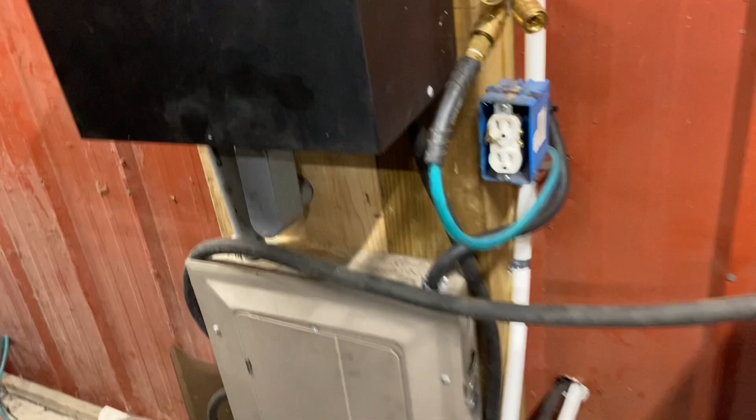I'm not an electrician by any stretch, but I did put this in. I have it mounted here with a 3-phase panel to break out all my power to different machines. Unfortunately, I only have 4 breakers, and I've got quite a few machines that run off of these, so I'm not able to run them all at the same time. I did pick this unit up used, but they're relatively affordable when you look at the cost of getting 3-phase into your shop. One thing specifically with this Haas VF1 that was an important note is this guy right here.

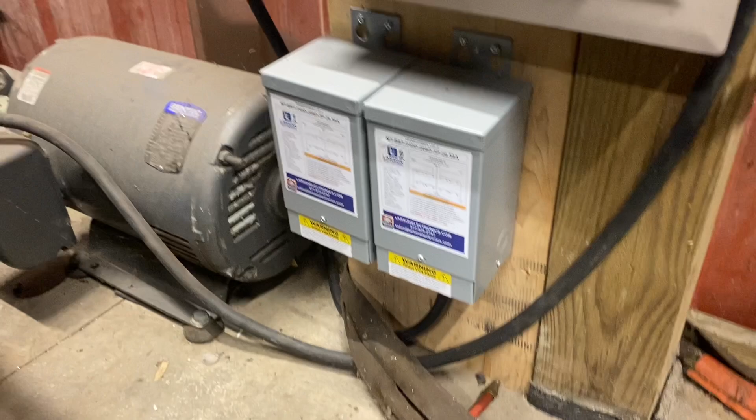I don't know if all the machines are like this, but this VF1 is rated for 230 volts, typically plus or minus 10%. The 3-phase power I bring into the shop combined with the phase converter's output actually ends up close to 250 volts, which is pretty awesome in terms of voltage supply, but it's too much for that machine.

When I first hooked it up, I had trouble with it overheating. If I wasn't running it consistently, it would sit and get an over voltage warning.

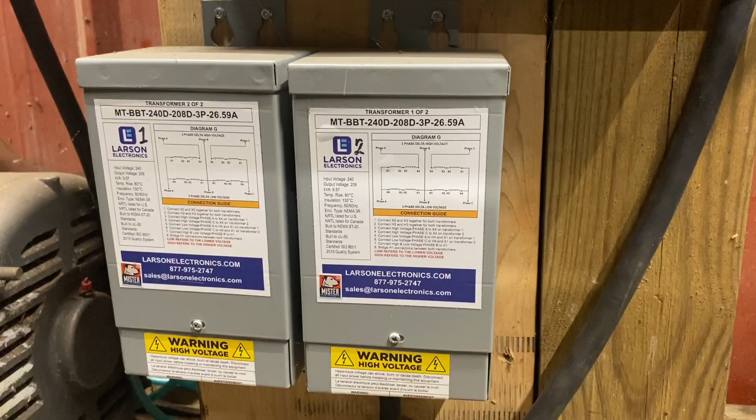It would shut off, and it was really frustrating. This took me a long time to figure out the right transformers to get. This is a buck boost transformer. If anybody has questions, I could probably find my original purchase order. I remember it was about 850 bucks, and that was kind of a bummer - money I really didn't want to spend, but it solved all of my problems.

It works great, and I haven't had that problem since. So I'll flip my phase converter on here, and I'll be able to power up the machine.

There's a breaker on the bottom of this phase converter that I often shut off. Occasionally I've had times, I don't know if it's supposed to do this, where power comes out here with it off on one of the legs. I like to be safe and not send power to my machines when I don't need it. I also sometimes come in to work on my machines and like to have the breaker off, so I always flip that off as a safety precaution. I don't know that you have to do that, but I like to.

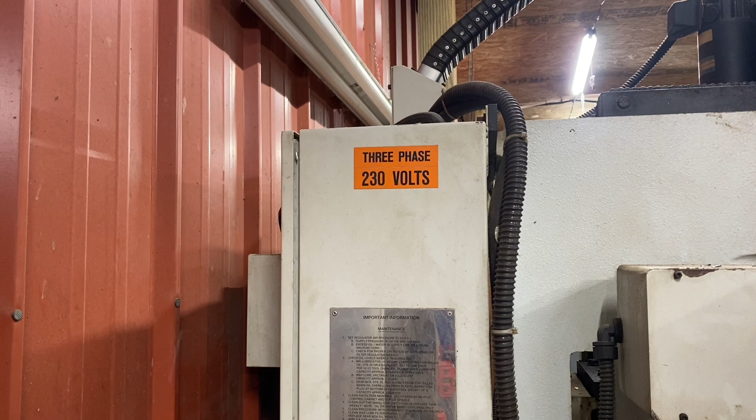Here's the label that says we're exactly at 230 volts. You can look at some of the maintenance stuff on here if you're able to read it. It's a pretty awesome machine, but you've got to send it the right power.

If I didn't mention it before, this is a Haas VF1. It's a 1996, almost as old as I am. In the world of CNC, that's a bit of an old machine.

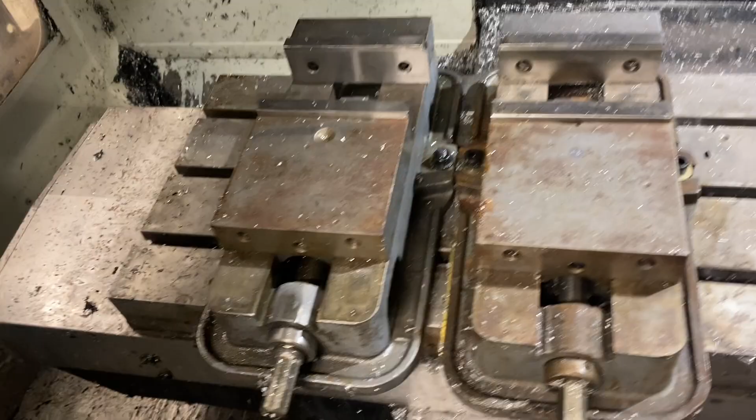I cleaned it up a little bit for this video, but I left some of the chips in there from this week because I'm being kind of lazy.

If there's one recommendation I could make, my only regret with this machine is the size. When you look at the size, this is a 16 by 20 table with 20 inches of Z-travel. When you think of a part that is 16 by 20 by 20, it's like, oh my God, that's huge, I can make some really big parts.

When you start to put in some longer tools, some drills, you lose a lot of clearance here. When you put a couple of standard vices on, you lose a lot of clearance. And if you have to bring a big tool around the outside of your part, that cuts into your work area quite a bit. But I am really happy with this machine.

I don't think I'll get rid of it. I'm happy with the price I paid for it, and I'm happy with the quality of it.

I am in the market for a larger machine just to make it a little bit easier to get at bigger parts and to have a little more high density work holding. There's a lot I could do, put a base on here, dual station vices, things like that. But ultimately having a bigger machine is a pretty awesome thing to have.

I do have this door very well engineered for a bypass. That's probably not a safe thing to do, and there is a reason they want you to have both doors closed to function this machine. But for video's sake, I'm going to leave it open for a little bit.

And I'm going to step you through the power up cycle. On these machines, it is really, really easy. I'll try to keep as much of the controller in frame as I can.

All right, power up is pretty easy. I hit my power on. Assuming I am sending the proper phases as well as the proper amount of power, this machine will power up. I apologize, everything is going to start getting a little bit loud.

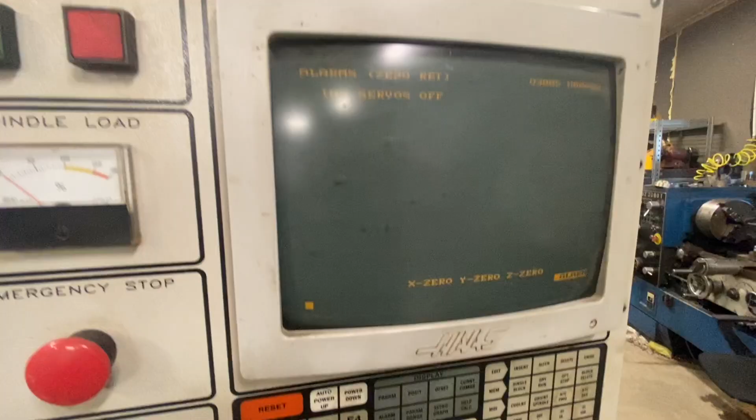Now when I start up, I am going to come up here with a servo off alarm. It's going to say XYZ0. It also has loaded up here the last program that I was running. When I hit auto power up, right down here next to my reset button, that's going to start homing all of the axes. I happen to have tool 1 already in the spindle. If I didn't, it would come and grab that tool as well.

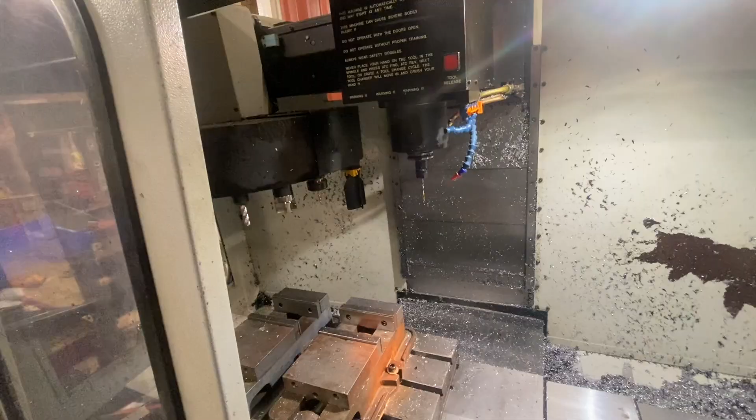The other important thing with this machine is having adequate air supply. You want to make sure that your air compressor is rated. I forget exactly what this takes, it's not a ton. I did have it on a pancake compressor for a little while just because it was convenient and I had one sitting here and didn't want to plumb air lines. That was really annoying because occasionally it would lose air pressure changing tools, and I didn't like that at all.

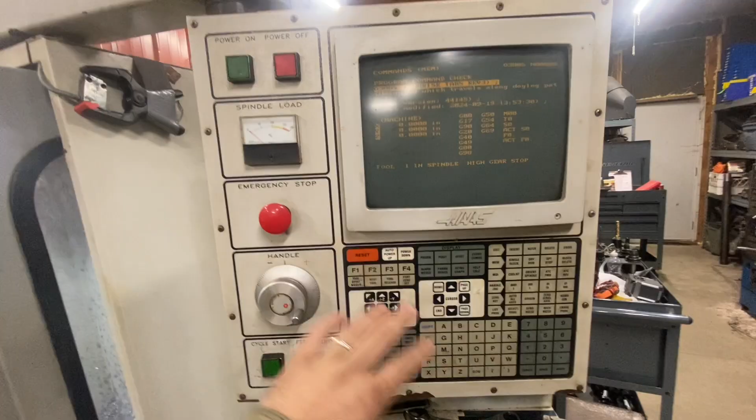It was very frustrating. This controller from 1996 has a bit of a different look obviously, but the buttons are in the same place. The functions are very similar to the brand new machines that I run at another facility that I work at. I'm going to show you some basic functions here. I'm not going to work through everything in this section because we're going to look at moving a program in here, but I will show you my program button will take me to the last program that I was running.

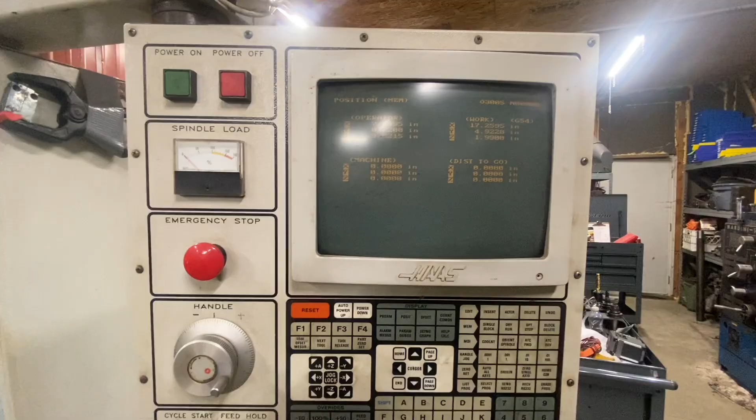My position button will take me to my position screen with my operator 0, in this case my G54, but whatever offset my program was last working in. My machine 0, which obviously everything is homed, as well as my distance to go if I'm in the midst of running a program. This is one of the things that I really wanted to get into the video.

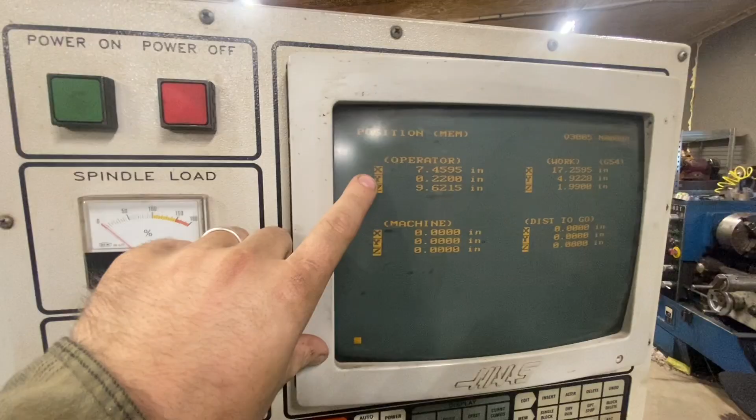This is something that I could not find up until about a month ago. I've had this machine for a little over a year and I was completely dropping the ball on this particular function, and that is my ability to zero my operator screen. This is really, really handy if you're using something like an edge finder, or perhaps your Haimer indicator to measure the height on a part and then on a feature or something like that. That operator screen is really, really handy.

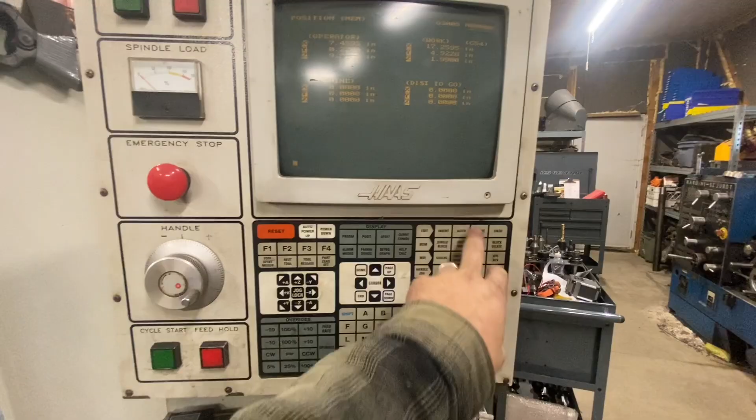I tried about everything, hitting X over here on my handle jog, origin, X alter origin, X alter origin here, and I was never able to get this screen to zero out and let me use an operator DRO. If this is something you've had problems with, I've read about it on forums and was never able to find this information. I accidentally bumped a button and realized what I was doing wrong, and I felt like a total idiot because it's incredibly simple.

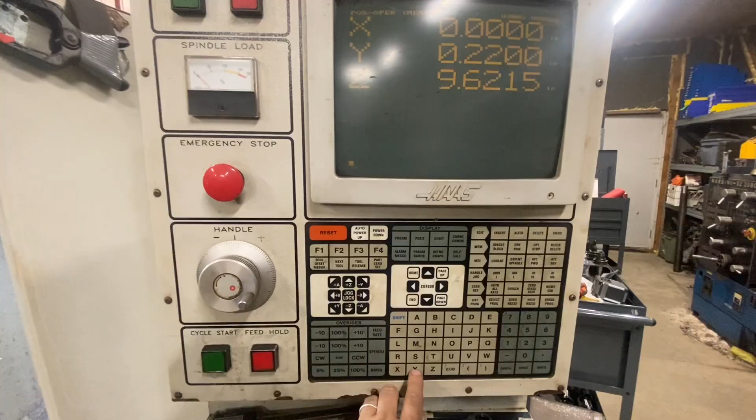All I have to do is hit my page down button. When I hit my page down button, I can move through these screens independently, and then ultimately get back to my home screen. If I hit it once, you can see here I am in my position operator, working from memory. In this screen, I am able to say X, 0 point, origin, and you can see that will zero my X axis. I could do the same for Y, 0 point, origin, and that zeros my Y axis as well.

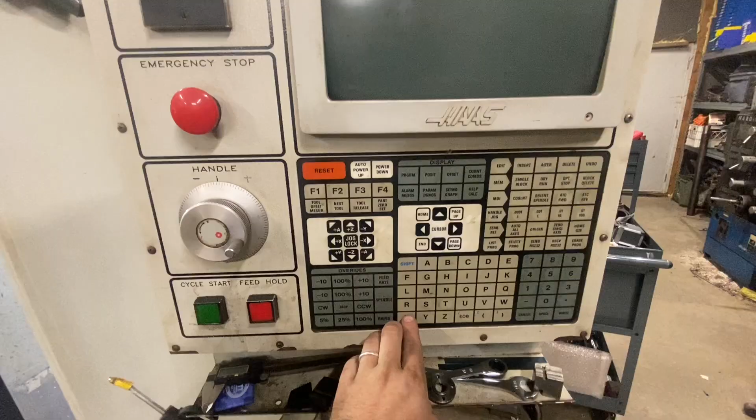I believe I can also punch in values, though I haven't actually tried this because I've only been using this feature for a couple days. I can say X 1.0, origin, and now I have 1 inch on my X. So if I wanted to move over exactly an inch, for instance, I'd be able to do that to find my zero. This is an awesome function that I wasn't able to use, and now I can. It's great, I can't believe I hadn't looked at that before.

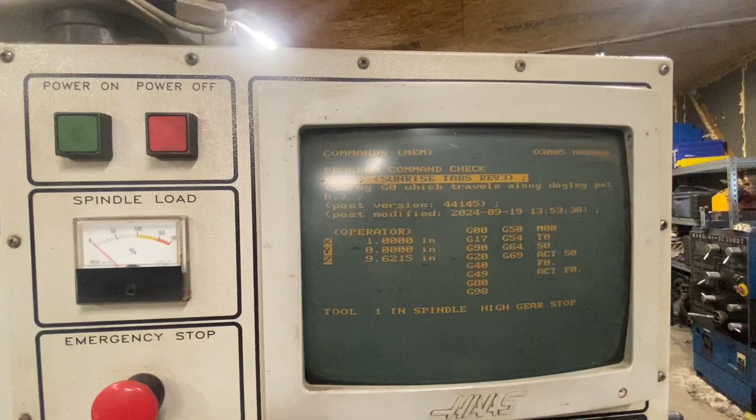If you're in the market for buying one of these machines, and you're curious how many hours does this machine have, how much time has it spent cutting, what has it done - if you can power it up at the place you're going to buy it, right here in this screen under your display, if you press current commands, that will bring you to this screen.

I can page down and see all my stats on this machine. This is one of the reasons I'm so happy with it, and probably why it still holds good tolerances. My entire power-on time is just over 1,000 hours. My cycle time is still under 400 hours, and my feed cutting time is about 227 hours on this machine, since the day it was made in 1996.

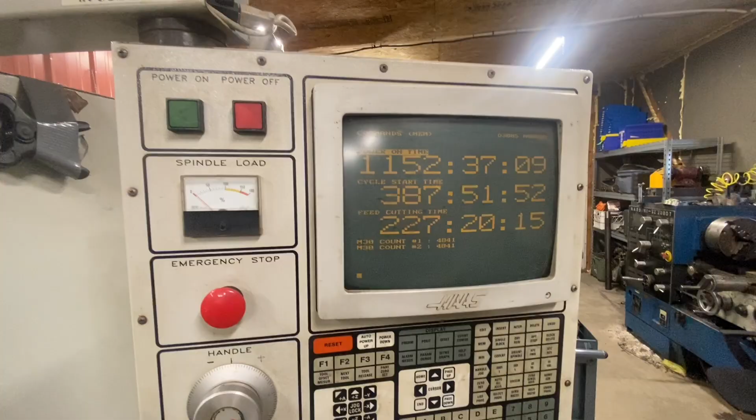You can't reset these. This is an incredibly low hour machine. In fact, I have machines from 2024 and 2025 that have substantially more hours on them, some 10 times the amount, because we run them 40 hours a week. So this is pretty cool.

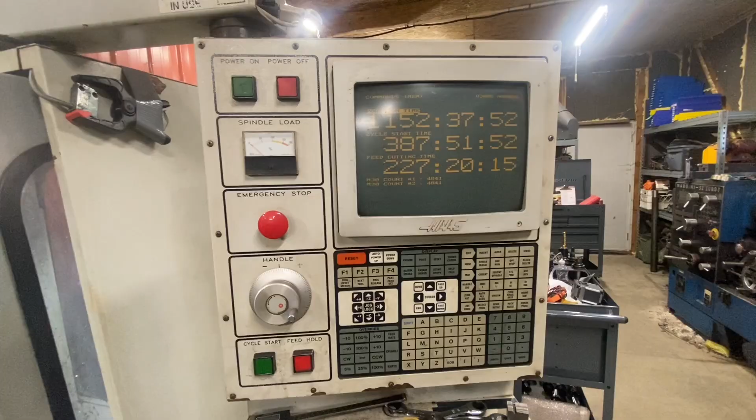If you can see that screen, you can find out how many hours this has, and that it's had an M30 count of 4,041. So this has made close to 5,000 parts potentially. Oftentimes an M30 doesn't necessarily mean you ran an entire program—it might mean you punched M30 into MDI and ran it 4,000 times. So it's not necessarily an accurate part count, but there's some interesting information you can find here, like your feed times, alarms, things like that under the current commands page.

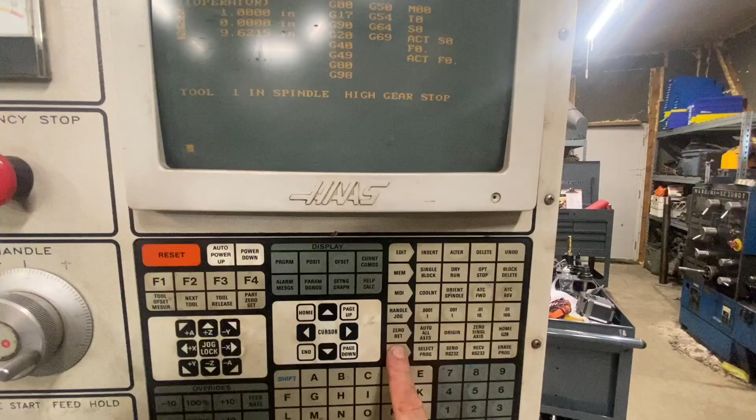Now imagining I already have a program loaded into this machine that I want to run, all my tools are set, my zeros set, everything like that. I can work over in this area from my list program here. I can find all of the programs that I have in this list. Many of these are either small parts I was running recently or parts I do often.

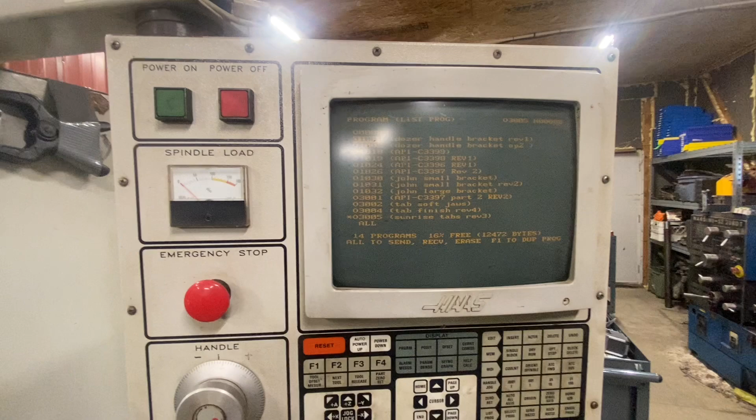This machine—one of the downsides is they have incredibly low memory. You can see I've got 10, 12 programs in here, and that's using up 84% of my available space. So I have 16% of my space left with 14 programs. That's pretty low. What I've found is I can hold about 4,500 lines of code at a time in this machine. I've run programs through it with over 350,000 lines.

So you're probably wondering how I do that. I'm going to step through next how I go about feeding this machine without overloading my memory.

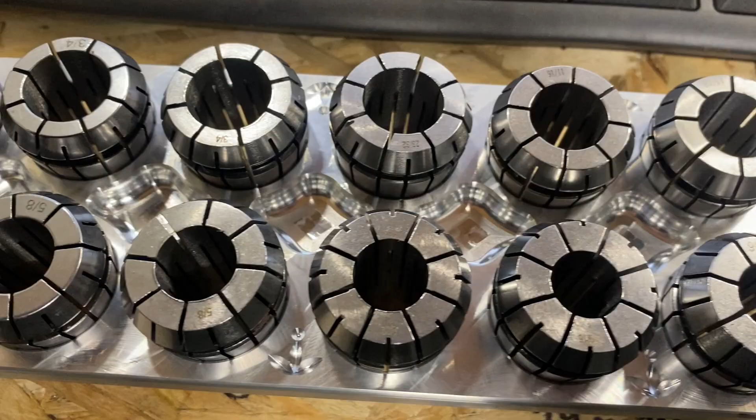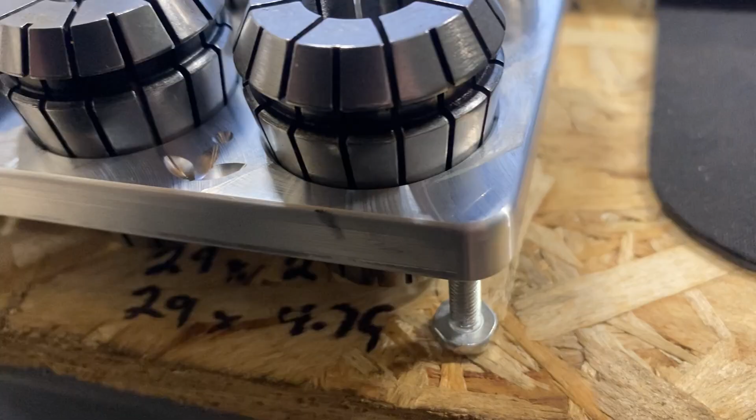I've got kind of a cool part here that I built on this machine—this is a collet holder. I've got to make a few more of these, so I thought it would be a perfect example of a part that's going to be a little too much code for this machine to hold in memory. As you can see, I've got some kind of intricate tool paths, radiuses on all the corners, some nice features, and radiuses inside all these.

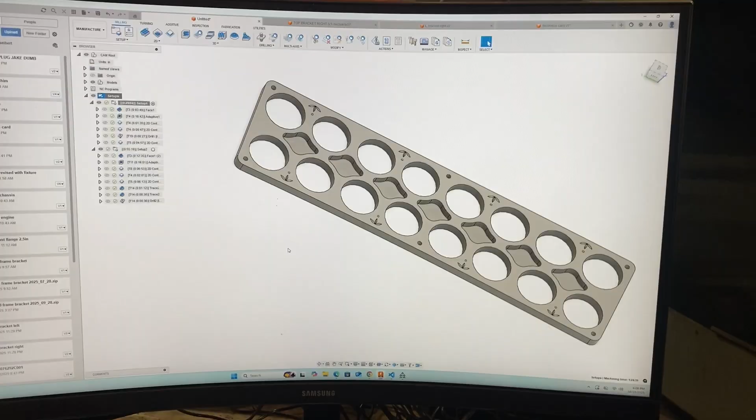I am going to change these facing passes—I did these with a large face mill. This part's a little long, not super well supported. I think I can get a much cleaner finish than that; my feeds and speeds probably weren't perfectly dialed. So I'm probably going to change that to a 1/2-inch end mill. It's going to take a little bit longer and be a few more lines of code, but I want to show you how I make a part like this on this machine.

In this case, I've already got this part programmed. I did make a couple changes, nothing crazy. You can see this isn't overly complicated. This is not going to be a full Fusion 360 tutorial—I'm definitely not a CAD modeling expert, and there are tons and tons of good videos out there already.

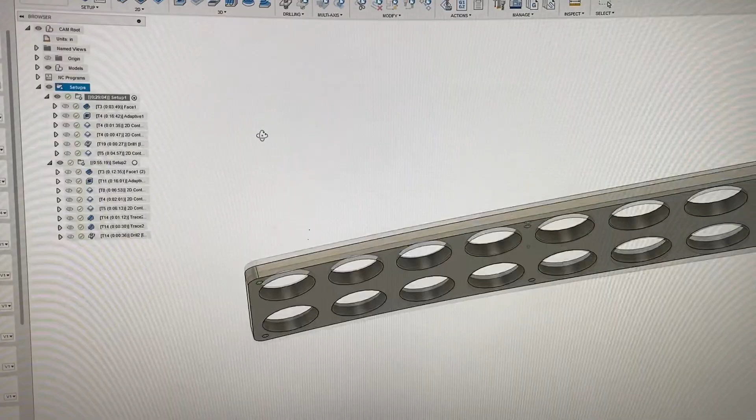In this case, I'd be doing the backside first, which takes about half an hour—29 minutes in this case. My top setup has a lot of intricate little tracing operations, and that's scheduled to take about 55 minutes. That's going to be pretty dense in code.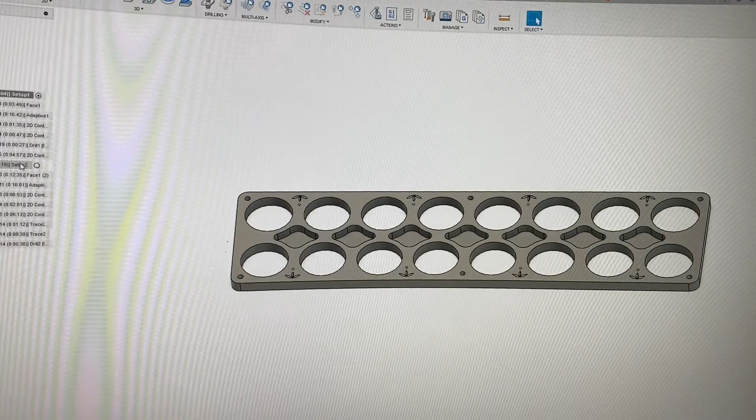So I'm going to show you my process for transferring that file over. Then after I do it, so you can see that this works, I'll go through some of the more intricate details on how we get the machine and the computer to talk to each other. Let's jump back into my adaptive path here that I have.

One key thing, this particular adaptive path is going to come in here and clean out these pockets. Most of the time with an adaptive path in Fusion, you should be using it for a roughing strategy. It's not a fantastic finishing strategy.

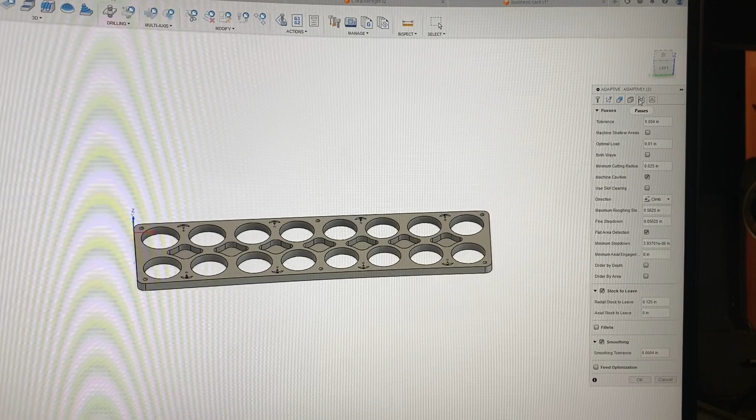If you're roughing, you don't have to be super worried about tolerance, things like that. This smoothing button right here knocks my code down by about 50%. This is under my passes tab, and it has made it a lot easier on my machine to handle these codes.

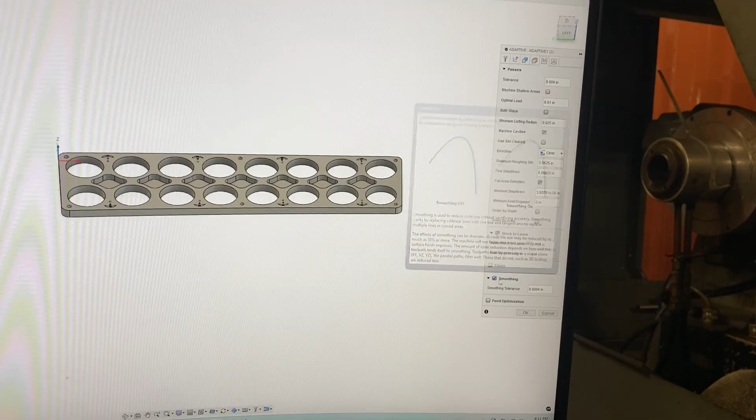A newer machine or a super speed controller can absolutely handle many points in a line. This machine starts to struggle on some really fast passes, particularly aluminum and plastic. If I don't select that smoothing and I'm trying to run at full RPM, full feed rate of the machine, with a point every 5 thousandths of an inch, it's really going to struggle. That said, just clicking that button is usually enough.

I'm going to post-process this. I should be able to just do a Control V. Yep, I saved that. We'll do the same thing, paste this in here.

A couple things just for my file management. When I am going to send a file to this machine, by and large, I leave it 1001 for my number. For whatever reason, I found, particularly when I get into higher numbers, I end up with some format errors, which is frustrating. I also make my file name and my comment the same, so the machine sees the comment as my file name, and the computer sees file name as my file name. If these are different, it can get confusing when I jump back over into the machine.

Other than that, there's some things that you can select. I do use a G0. I don't force the XY home on position indexing. I don't like that. Everything else that came out of this post was pretty much accurate.

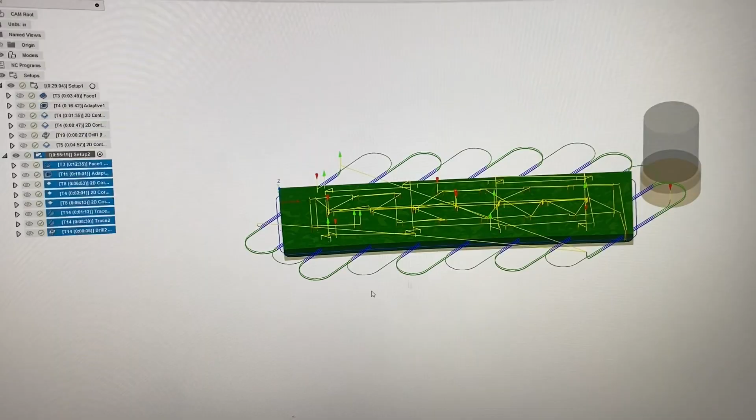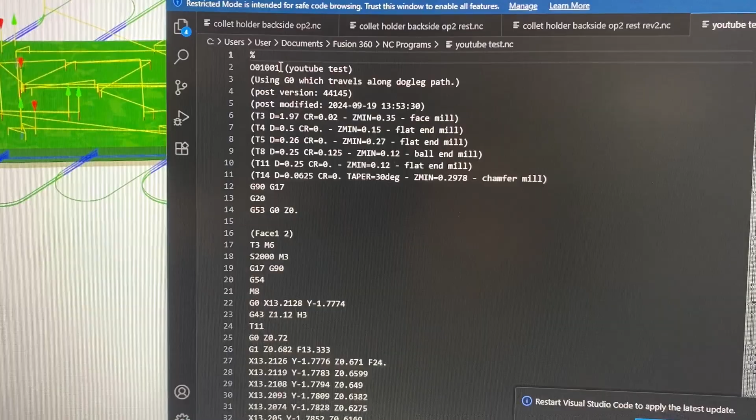I'm going to post this. I forget the name of this program that it dumps into. One of the problems that I have with every single one of these codes that threw me off for weeks in setting up this machine, for whatever reason, out of Fusion 360 -- let's see if I can zoom in here -- my program number is set to 1001, and I end up with an O number of 01001.

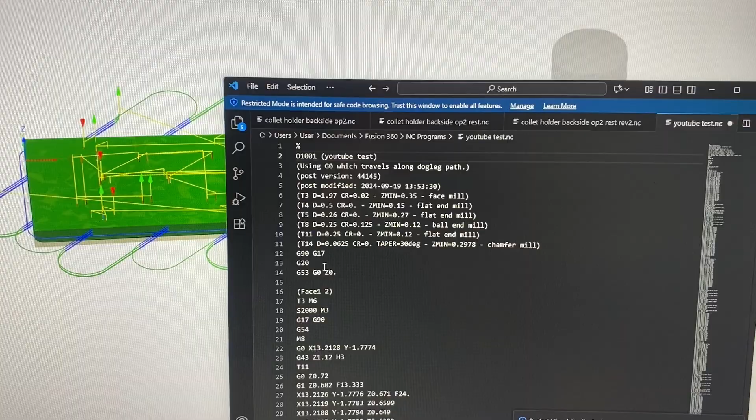That's probably something I can change in my post processor. I should. It makes me nervous going in there. So what I have to do is come in and delete this 0. This machine, for its formatting, is looking for a percent sign, an O number with 4 digits, and then your file name in parentheses, and it should also end with a percent sign. If that's not the case in the code you're outputting, that's something you want to check. It's an easy thing to do.

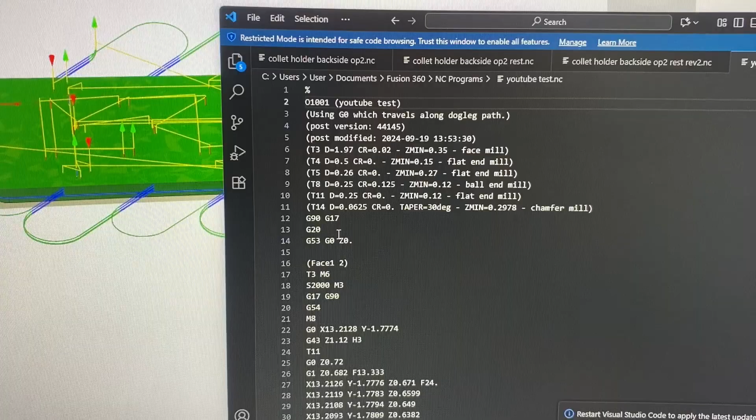One of the other things that I do in my post processor here, as you can see, I have my tool names. They're not super easy to read, but I also throw in my Z minimum height, and that way I know, in this case, my parallels are about 110 thou below the top of my vise. I'm going to be contouring the outside of that with this half-inch end mill, and 4 is my half-inch end mill.

0.15 -- that looks a little more like it. I got about 30 thou above my jaw face. It's a little bit tighter than I like to be, but I don't want to cut this out of thicker material than it needs to.

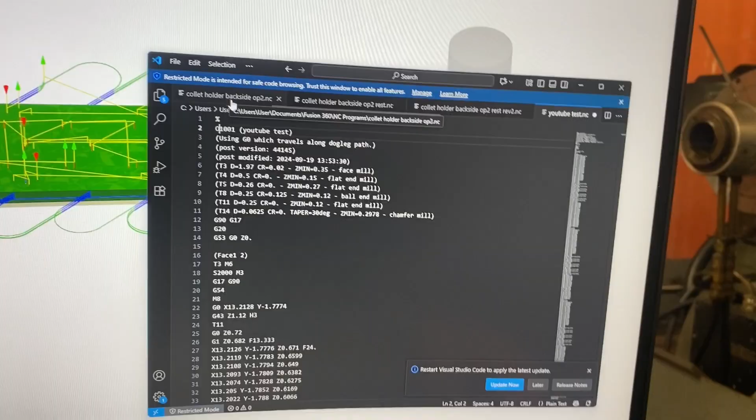So once I'm out of that, I'm going to hop into the program that I use to send files. I have that open here. Oh, I'm going to zoom out a little bit. This is called DNC4U.

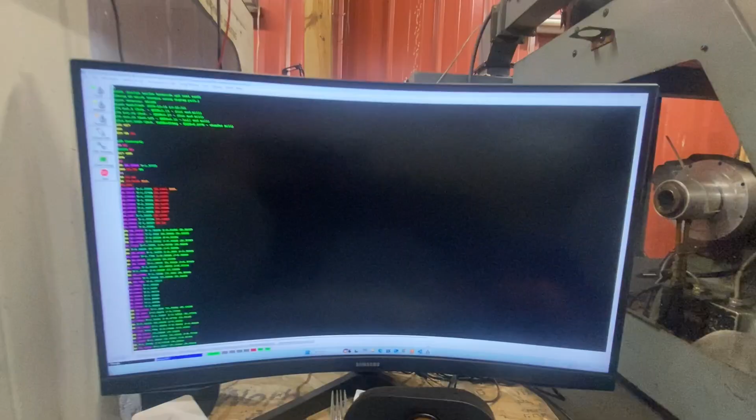This is the program that I found that works well -- DNC number 4, capital U, DNC4U. This has been the best program that I've tried. I've tried a number of different G-code senders.

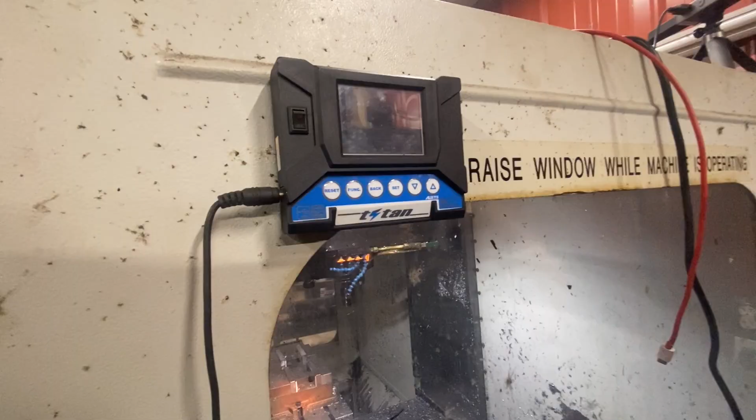This one works great. When I first started with this, I used one of these Titan senders. This worked okay -- I got this one used from a friend. It was not perfect. I keep it around just in case this computer ever crashes or I need to upload code from something else. But this program has worked really good. I won't say flawless -- I do have a couple quirks with it that I've learned to work around.

This is the program that I use. I'm gonna go File, and Open File, and that will take me right to my NC programs. In this case, I'm looking for that YouTube test. When I do a lot of the same parts or a bunch of parts for a job, I like to save them into files. In this case, it's just getting dumped in here, and that's gonna populate my G-code.

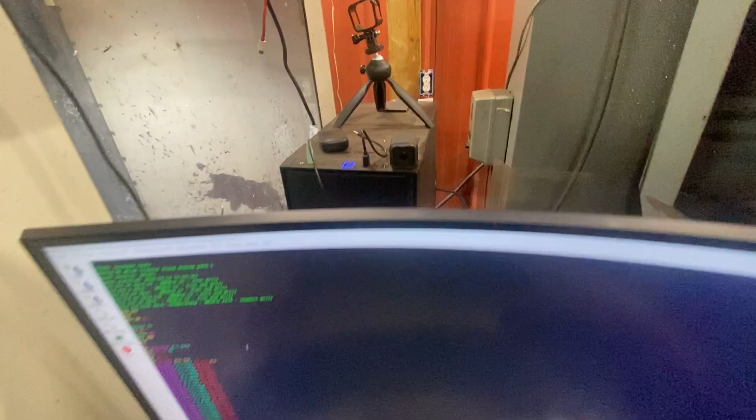One of the really important things with this DNC4U is you need a computer with a native COM port. I actually had a computer built for this, a decent desktop computer. I ordered it from a friend who builds computers. I'm not a computer guy, I'm not super tech savvy. This has been quite a learning experience for me.

But you need something with a native COM port for this type of sending that I'm gonna do. I'll show you over here if I can find it, up on my shelf. You can buy these on Amazon. I actually borrowed one from a friend and then bought my own, and you can see I've never taken it out of here.

I've got some stickers in the bag from something else. I used one of these. This works to send code to the machine if you're going to save that code in the machine. You can send a file, you can store it in the machine, but again, that's only up to 4,500 lines. This is a great way to do it when you're setting up.

Say you don't want to buy a custom computer, it's hard to find something now with a native COM port. These do work, but you will not be able to send code and run it consistently. I don't know how that sticker actually got in there, because that is not a sticker from this product.

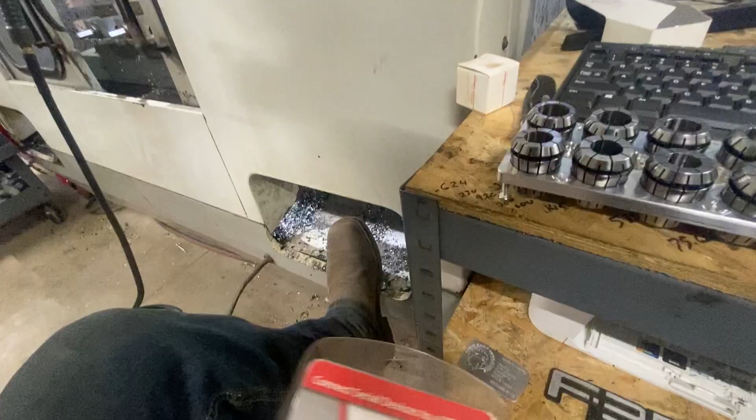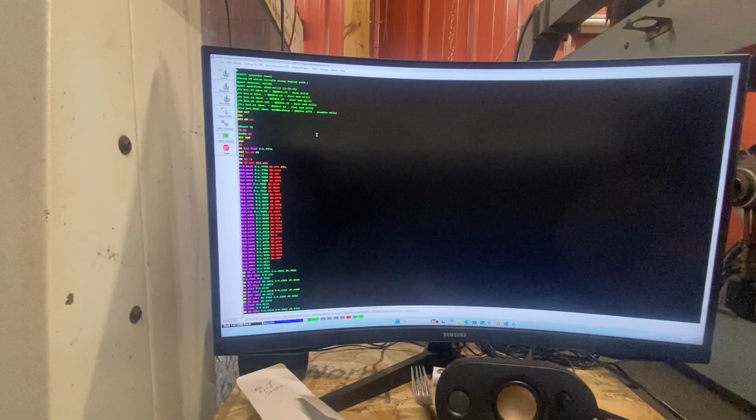But what I did next—I don't have the computer anymore, but I used to have a computer from the 2000s, a laptop with a native COM port. I was able to kind of revive it and get it working. It really worried me, because if that computer ever went down, I'm stuck until I can find another one. It'd be difficult to find somebody that can repair it, all that kind of stuff. So I opted to buy a computer, and actually the day after I ordered this computer, I knocked that laptop over and broke it, and it no longer works.

Within this DNC4U, you can run a free version of this to test it. I think to buy the full version for a computer is about 125 bucks. Absolutely well worth the money. It's the cheapest, easiest option that I've found that is consistent and reliable.

If I go to my CNC settings here, I'll show you. First, select CNC. I'm working with this Haas VF1. If I'm running more than one machine off of this computer, I'll change it, but this is the main computer that I use for this, so I have the right thing selected. Within this, I can select my CNC settings.

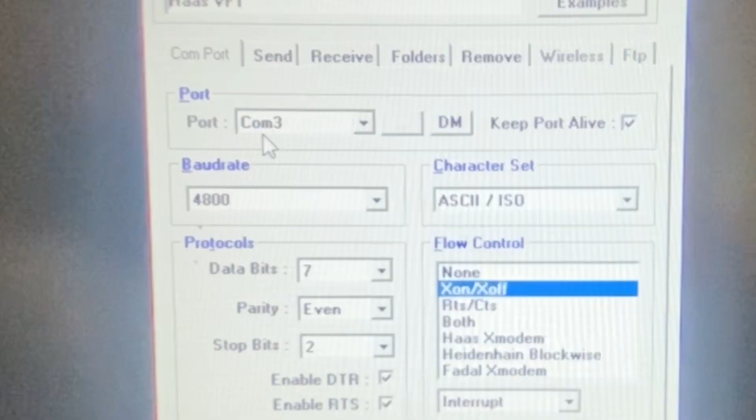You can see in this COM port, there are some really important things for connecting the machine and the computer together. There's a baud rate, your protocols, your data bits, parity, stop bits, your flow control. That is all very, very important. I don't know, I found these particular settings somewhere and they work, so I don't change them.

The one thing I have done is I will bump up my baud rate occasionally. You can see, I think my machine will only go up to 9,600. What I've found is 4,800 is completely adequate for what I'm doing—I haven't had trouble with it. When I bump up to a faster baud rate, you run the risk of more interruptions and things like that.

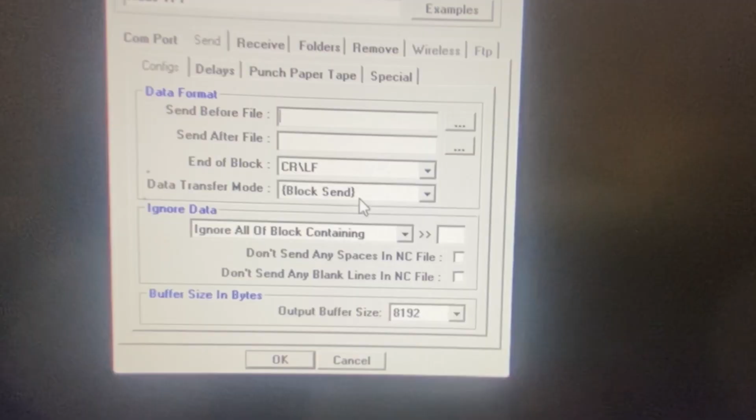The other thing that I want to do for this particular style of sending is make sure right here I am on block send—it's difficult to see, block send. That will work where it basically puts a little bit of code into the machine and runs it. When it starts to get through that code, the machine calls for more code, it uploads more. When it gets through that, it calls for the next block of code. That works great.

I've always referred to that as drip feeding right here. Drip feeding sends a consistent flow rate to the machine. That is what I use when I'm sending a code to store in memory.

But when I want to actually run through a program while connected to the computer, I'm going to use this block send.

Hit my settings key and page down a little bit. There's a number of settings here to run through. Let's see here. Here it is, RS-232 ports. Use right or left arrow key, that bumps you between stuff. Let's see what I can get up to.

I can run 7,200, 9,600. Oh, I can go way high in the baud rate. But 4,800 is what I found supplies enough data that I'm not lagging, that I'm not getting stuck, as long as I smooth those tool paths.

But it doesn't seem to error out. That's my particular case. I also have the parity, stop bits, synchronization, RS-232 data bits, my end of block pattern - all of that stuff matches from this machine to the computer. I don't know that the specific selections are incredibly important, but it is incredibly important that they match, and these ones happen to work.

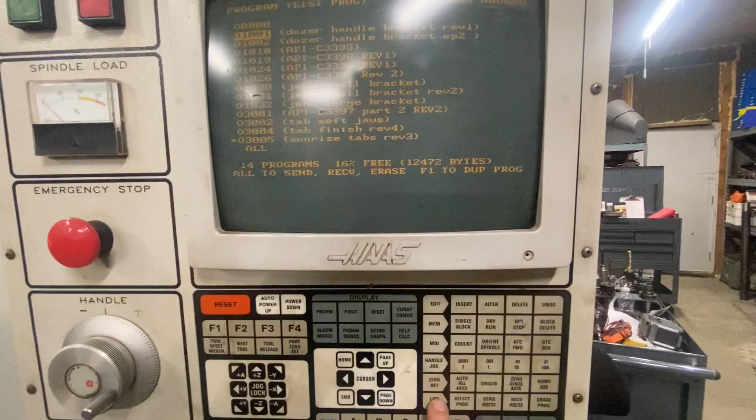All right, now to actually get this code to start dumping into the control, there's a couple different options. If I was planning on sending this to the controller, let's say I had enough memory, I would go to list program. I would work my way down to all, using my arrow key here.

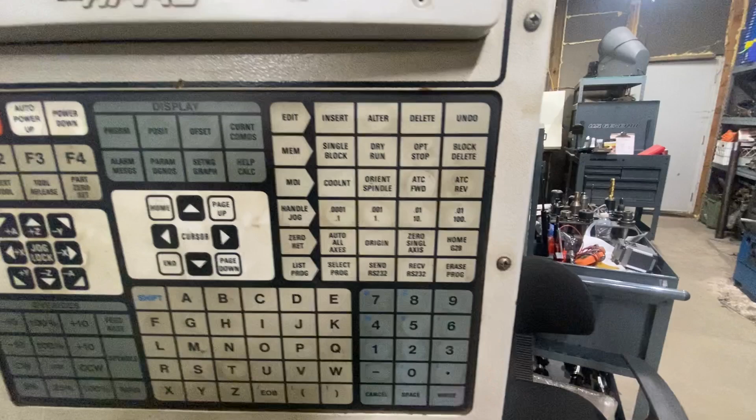And down here, I would select receive RS-232. This here will say waiting. That is going to accept a program into the memory of the machine.

Now in this case, this program I haven't scrolled down to see, but I think it's about 150,000 lines. That's about 10 times the memory that this machine has, and definitely more than the 16% that I have left. So if I were to send this into the memory, it would fail because my memory would be full, which is really annoying. So we're gonna come down here and instead we're gonna go to MDI.

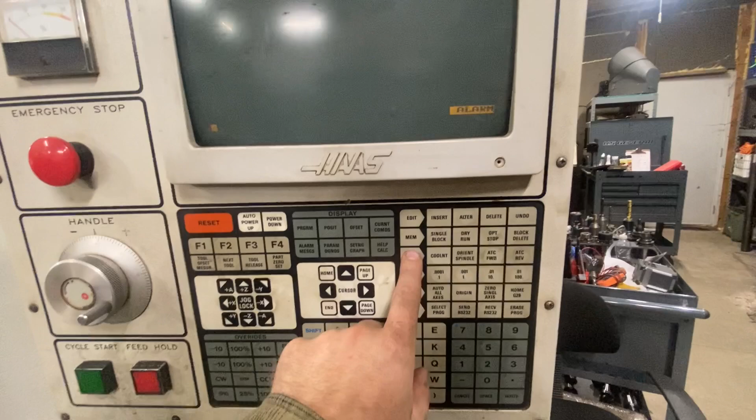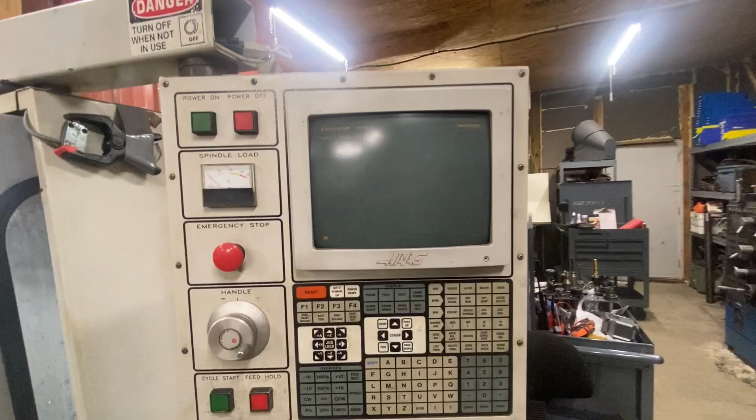It aborted that, that caused an alarm. So here I'm in MDI. This has my code to warm up my spindle here for a second. If I hit MDI a second time, now it's gonna say waiting for DNC. When that says waiting for DNC, this controller is ready to start accepting code from that block send.

Now let's hope this works and I don't have any hiccups. Now one of the tricks with this DNC that I had not found in the instructions or anything like that - my assumption would be that you hit send right here. You don't hit send, you hit window. Don't ask me why, I didn't make the program, I don't know what it means, but that's the button that you press. When I hit window, this is gonna pop up.

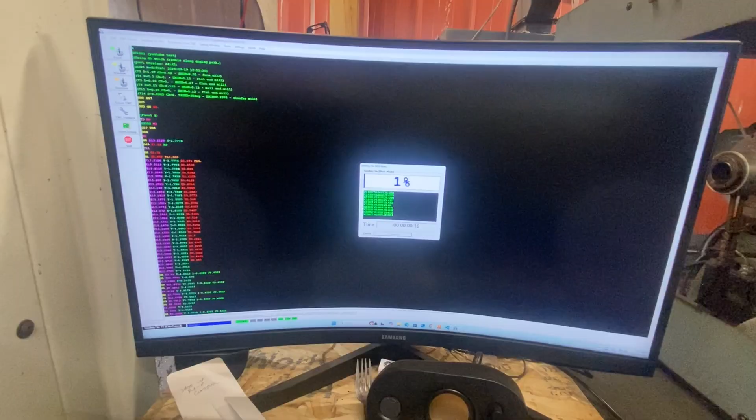You can see it is sending code through my COM port. It's only sending as much as the machine wants to take. It's gonna stop. When the machine works through that code, it'll pick up again. Now, if we come over here, assuming I didn't mess anything up, you can see right here, I've got program 1001, YouTube test, ready to run.

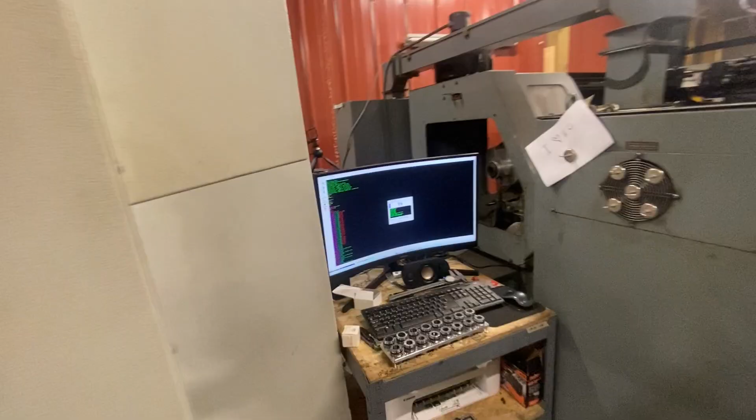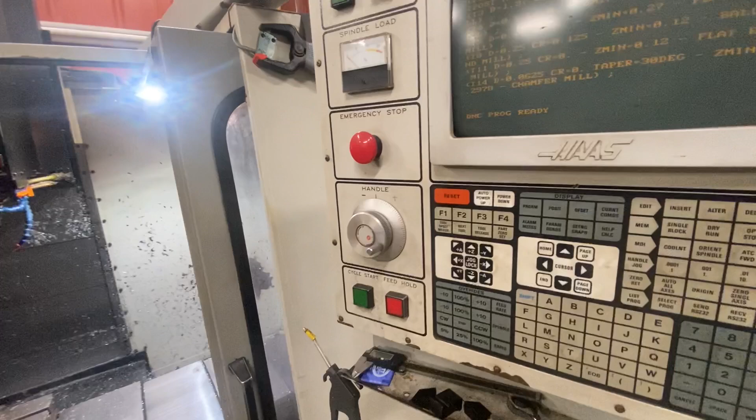Now, the nice thing about this, as opposed to using the drip feed function, this will fill up. I don't know what it's gonna get to. Right now, we're at about 5%. When this reaches the amount of memory that it can take, it's just gonna stop and it's gonna wait for more code. So I don't have to rush over here to hit my start button, right? I'm set up, I can wait, no big deal. I can let this code sit on the machine, I believe indefinitely.

I don't know that for sure. Assuming all my tools and offsets are set up correctly, I can hit cycle start. When I hit cycle start, it's gonna start running through that code. See, I'm gonna come in here. I am gonna bump my coolant off as soon as this starts because we don't need that running. And you can see this is gonna start the facing cycle on that part.

Now I don't have the part in here. I also didn't change this to the 1/2 inch end mill like I mentioned, but this is running that program that I input. This is set to run. This code's not gonna be moving by very fast.

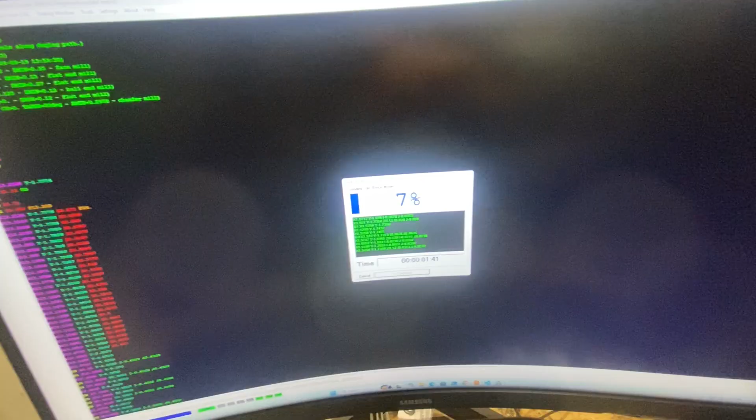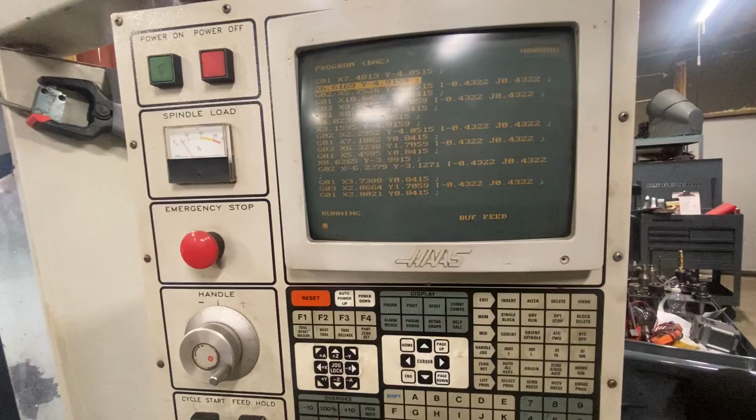I might bring you back for one of the adaptive paths so you can see how that runs when I start cranking this out. You can see here this stopped at 7%, it's just waiting for more code to come in. No big deal. When this code is done running, assuming it makes it all the way through, it will stop and generally alarm out. It doesn't like an M30 on the DNC settings, so it'll say improper code. No big deal, I leave it as an M30 in case I take this to another shop and run it on a newer machine. Code still works, not the end of the world.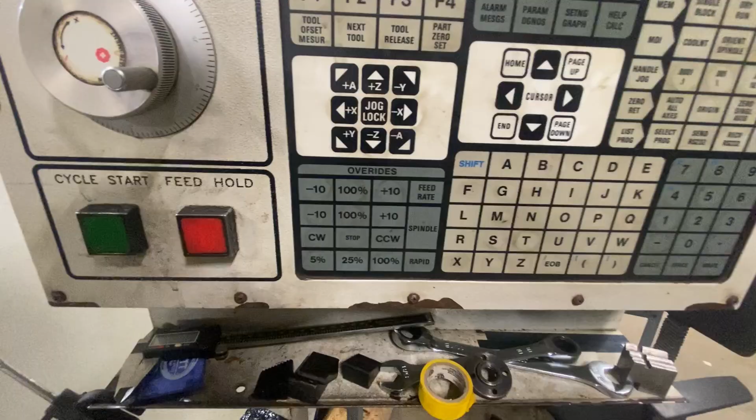While this is running, I've got my options for feed rate override, spindle override, and rapid override. In this case, I've run this program before, so I'm not worried about slowing the rapids down. No big deal, but if you wanted to, this is where you would do it.

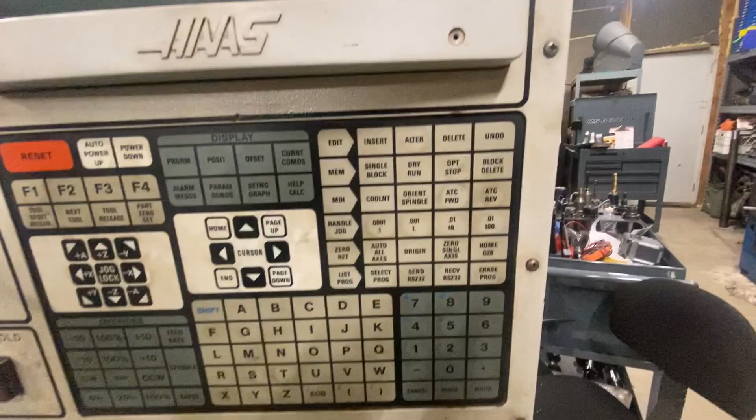It also has options. One I really like is optional stop, I use this quite a bit. It pops up there, my optional stop, I have an M1 in between each tool change. Usually once I see and hear a tool running, I trust it enough to leave. But if this was the first time I was running this program, or if I've got close clearances on something, I'm running a new tool I haven't tried before, or I'm unsure about the way I touched it off, that optional stop will stop it just before the tool change, and I have time to come over here and keep an eye on it.

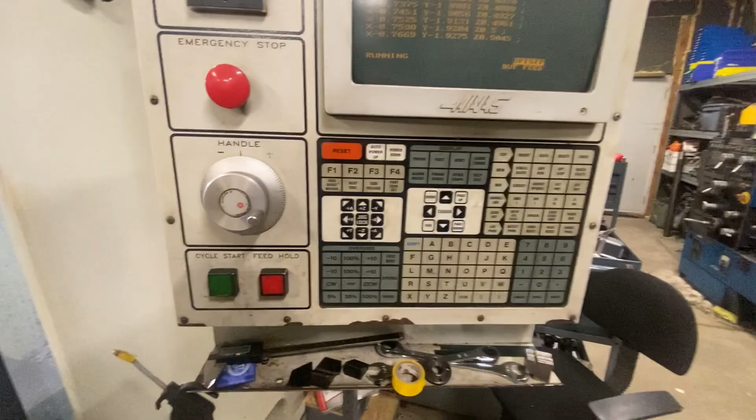That's basically the whole thing. If I wanted to stop this at any point, I can still run my feed hold. That works great, it'll stop within the code, and I can hit cycle start again and it'll pick up again. You can see that here. If I hit feed hold and go, it'll stop moving and then start moving again.

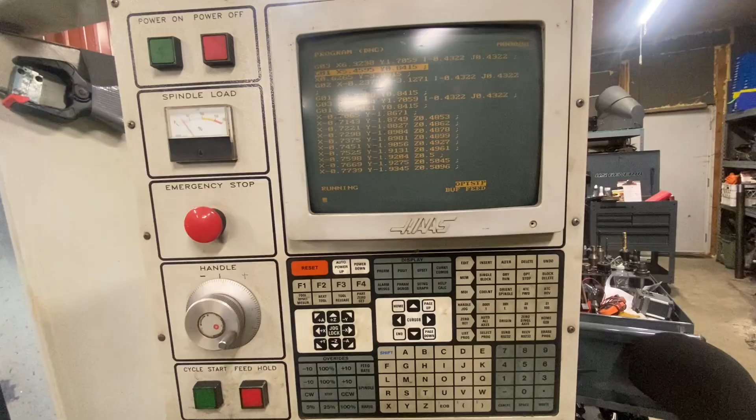So pretty simple stuff. If you're familiar with the Haas, the new Haas controllers, or one of these old machines, it does not take a lot to get used to. I will take you around the back of the machine in a minute and show you those RS-232 ports so you have a good understanding about how that connects and the important parts with that.

All right, we're back here behind my computer to show what we're doing. The important thing with your COM port is that you have a DB9 connector that jumps to an RS-232 connector. What's important too, particularly for sending data over a long period of time, is that you have the shortest cable possible. You can run these through 100-foot cables, but the shorter it is, the better.

In my case, I have two connectors here. You can see up here serial port number 1, serial port number 2. Number 1 is for my connection to my computer. Number 2 is for my connection to my 4th axis. If you're running a 4th axis in your machine, I do have one for this. Hopefully I can do some setup tutorials on that as well, because that's been really difficult to find.

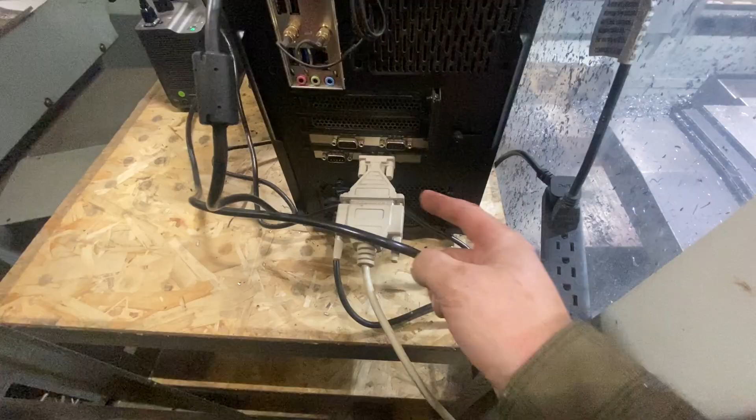The key part with this, and you've probably seen this in other videos if you're struggling, is you do need a null modem connector. I forget exactly what this does, it does something to flip the send and receive on these. I don't have a full understanding of it, like I said I'm not a computer guy, but you need a null modem connector and an RS-232 cable.

In this case, on this machine, since I had it built, I got 4 COM connectors. I've got a couple other machines I like to be able to connect to. I don't want to have to unplug from one COM port and change my CNC settings every time. I want to have all those settings in the machine, have 4 native COM ports that I can use, and that works out really good.

This computer, by the way, it seems like it would be an expensive task to get a custom computer built, but this is only about 800 bucks, and it is so much more than what I need. I think I could have gotten a $200 computer with a COM port in it. It's really difficult to get them in a laptop, and a desktop seems to be just a better option, kind of a dedicated machine for the shop.

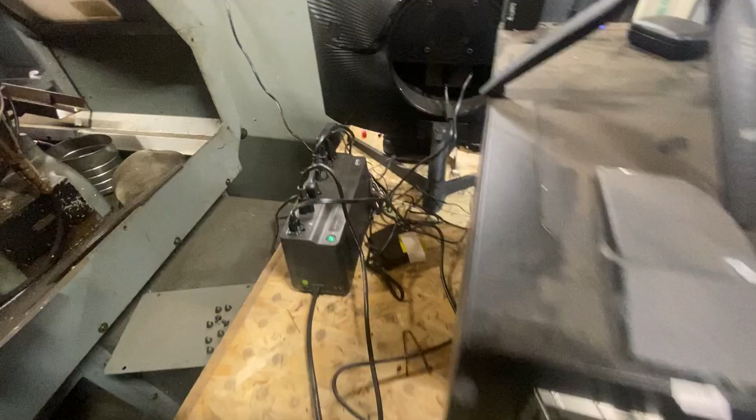I wanted 4 COM ports, and I wanted it to be under $1,000, and he delivered, and I got a great computer. The other thing that I strongly recommend is running a battery backup surge protector on your computer.

This does a couple of really valuable things. One, we're in a shop. I got other people in here welding sometimes. Sometimes I'm running other machines, sometimes we'll be running grinders. I do trip breakers occasionally, and it sucks if you're in the middle of feeding that code and your computer shuts off. It's hard on your computer, it's hard on everything, and it'll make the machine stop, and I gotta figure it all out again. No fun. So the battery backup deals with that.

The other thing is with the large amounts of power I'm pulling to fire up the spindle of the machines, it does occasionally draw the voltage down in the shop, and that can wreak havoc on computers, that voltage fluctuation. I think this is about 50 bucks. It's worth its weight in gold. It'll save you a lot of headache.

I just picked this one up at Walmart and I've got consistent power to my machine without, if a breaker blows or anything like that. It'll also beep when I lose power, so I'll hear that beeping and I'll know that somehow I tripped a breaker and I can go flip that back on before this battery dies. But I think this will run the computer for about a half an hour.

Super, super good investment. All right, guys, I think that about sums it up for this video. Really light overview on these machines. If you have any questions on it, I wouldn't say that I figured everything out, but I've got a pretty good idea how to run this thing, how to get code into it. I've had countless other problems that I've had to work through.